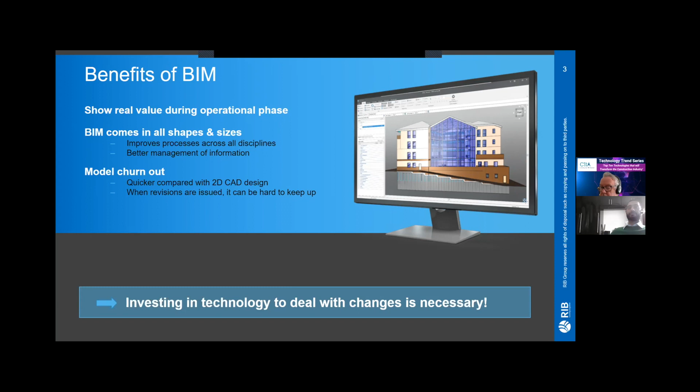So with a tool like i2 CostX, we've had a lot of interest in the revisions feature in particular in the past few years. It's been a hit from the asset owners doing cost reinstatements on existing buildings to the cost consultants who want a full audit trail during the pre-contract phase.

And after Rev 152, the client says, let's go back to Rev 101, because that looked a lot cheaper, and I like that design more. To go back to that revision and that iteration is possible in CostX. You can compare the drawings together, and you can run reports to show the variance. This also applies for post-contract, and you can provide cost value reconciliations to clients, which are extremely valuable.

An example that springs to mind, it was a large project just outside of Dublin, and the subcontractor put in a claim for 6 million, and my client said to me, I think this is too much. Can you help me identify this change in the model and see if there's any basis to this claim? It turns out that the claim was only worth around 2 million. So whether the subby was being devious or it was a genuine mistake, at least it was realized, and the benefit of doing this 5D exercise was clear.

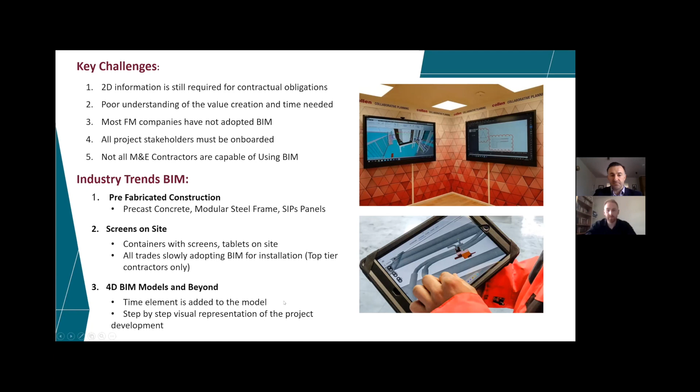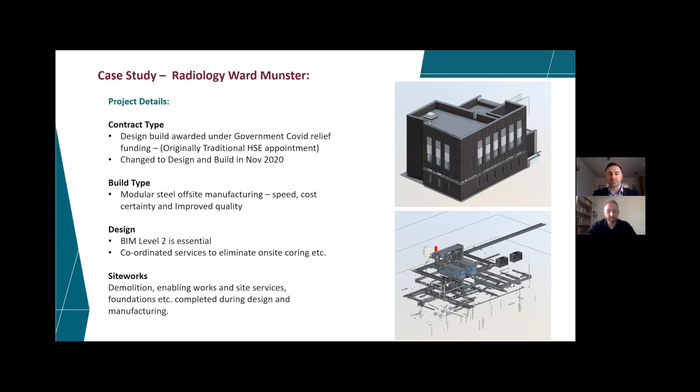So for this, we've come up with a quick case study of a building we're actually building at the moment, and this really demonstrates the true value of BIM and design build. So we've got a radiology ward in Munster that up until November 2020 was originally a traditional HSE appointment, and because of COVID relief funding, they changed it to a design build in November 2020. So the build type is modular steel offsite manufacturing, used for speed, cost certainty, and improved quality. The key catalyst of this is BIM level 2, which is essential for architectural, structural, and M&E building services. Without that, this project wouldn't work.

So compared to traditional, this building would have taken 3 years through public procurement, GCCC contracts, etc. We're seeing this done in 40 weeks. We need to learn from this. We need to be able to build buildings this quick, and BIM is the key catalyst. So I'm going to hand over to Cal there to go through some more detail of the design collaboration.

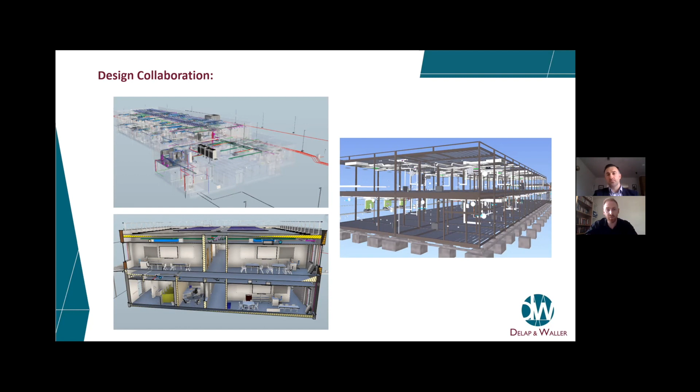But even with the interoperability tools, we were able to coordinate with those guys for all their external services and incoming services. So the likes of the architect, we were able to coordinate for ceiling voids, all our ductwork above classrooms, the steelwork for all our ductwork, pipework, foundation work, coordinated around all that. And this time we had the fixed furniture as a Revit model, which was a great help for us. It meant we were able to design our teaching walls, as it was an educational building. All our small power data were able to get laid out and designed from a very early stage. So definitely from a design perspective, huge benefit, and with weekly DTMs and weekly workshops, we definitely ironed out a lot of issues at a very early stage. Okay.

So clash detection, probably another one of the main benefits of using BIM in our projects. We've actually built clash detection into our normal design process in-house. So for all our projects, we have weekly clash detection reports printed off, even just for peace of mind, to check our own work, just to make sure we're designing everything fully as it goes along, finding huge benefits in it. Then when it goes to shared for the wider design team, we're having weekly meetings, and resolving these clashes at a very early stage is obviously saving costs.

We're not reordering steel or anything like that for the sake of a mistake. So that's definitely working out really well. For the sake of producing reports from the model, we can assign items, we can assign tasks. Everyone's tracked, so everyone's recorded the progression of the site. So it's definitely a massive benefit for us guys.

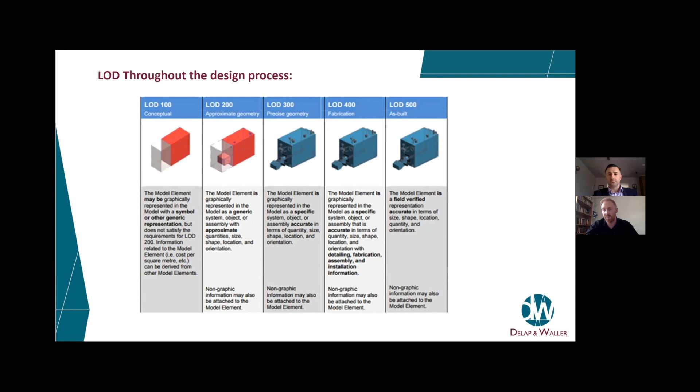And probably more importantly, the non-graphic information that's attached to the family. So all of your data sheets, all of your technical information, that's going to be embedded within this family. So when we go to run off schedules later on, it's back to what Milan says, having confidence in the model. So if we're having greater levels of detail, people are going to have more confidence using the kit, and it's going to help the BIM process move along.

So it's very reassuring to see a lot of the manufacturers get involved with producing these for the BIM process. And a lot of them are now getting accredited for the work, so it's getting the rubber stamp. So it's going to have massive benefits. It's going to help us produce a better end product. It's going to get a better end product for the client. It's going to give more value to the BIM model.

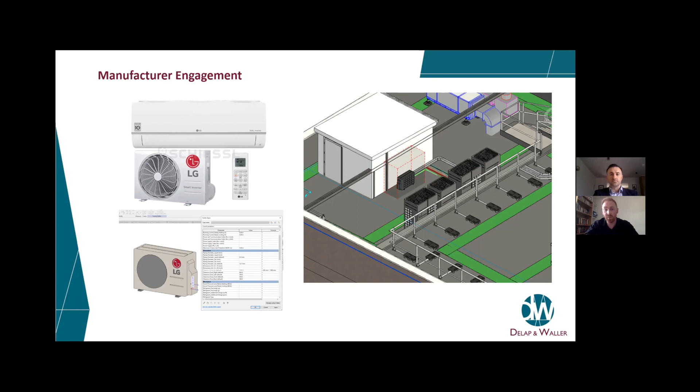So it's going to help the whole process along. Okay. So just for our final slide, just a few notes on where we see the future success of BIM from our perspective from the building services. So generative design has been mentioned previously. So we're going to start using it for mechanical design. So we're getting instantaneous designs based on a set of parameters. So it's going to give our engineers more time to do their engineering work.

FM engagement. So what I've talked about, all the previous data, technical information is going to be held within our model. So we want the FM team to be able to run the building to its maximum potential. All the information is there. They're better off using it.

New talent in the industry. So the BIM process is becoming a lot more popular. We're starting to see people come across from other industries, graphic designers, data, information. So all this new talent is going to bring new ideas, going to push the boundaries of what we're doing.

Over the last year or so, we've seen COVID help speed up BIM processes, and for sure it's showed how important technology is within the construction industry, which might not have been as realised in previous years gone by. So for collaboration, like weekly Teams meetings, we're just going to see it more, and it's definitely helping the collaboration process.

Just on a final note on sustainability, we're seeing a growing interest in energy consumption and green buildings. BIM tools are starting to comply with standard sustainability assessments, which is brilliant. So to save us duplicating work, having a sustainability model, we just want to see a few more further improvements in interoperability to save the duplication of our work, and just have it all centralised within the model.

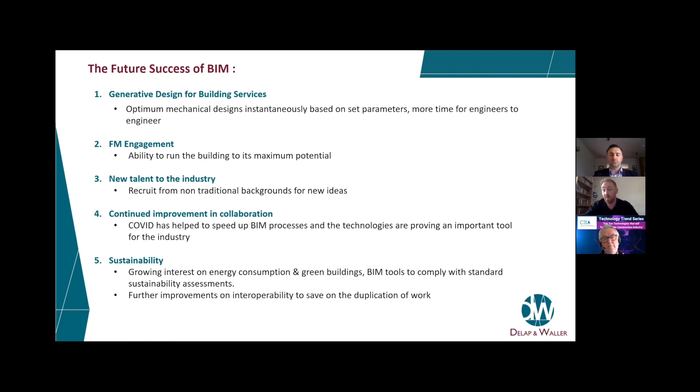Okay. Thank you very much, Conor and Cal. That was very informative. A lot of interest around, Conor, your comment about abandoning the model. We might come back to that. There's a few comments coming in on that. I suppose that's the pragmatic approach, bearing in mind that the rest of the supply chain maybe are not using it or whatever.

But what's coming across very strongly is, again, like what Milan said, Conor, you mentioned about clients, to get this cultural shift, we need to get clients requesting this, and we need to get smarter clients requiring this going forward. So thank you very much. So plenty of scope for questions as we get towards the end.

So our next presenter is Davitt Lamon. Many of you will know Davitt. He's based in C.W. O'Brien Architects. And if we're talking about what's trending at the moment, we have to talk about the Irish Annex to 19650 Part 2. So Davitt, you might talk us through that and give us an insight as to what's happening in the world of architecture. Perfect. Yeah, will do. Thanks for the introduction, Alan.

Much appreciated. If you're wondering who am I and what I'm doing talking to you about BIM while you're trying to have your lunch, I'm an associate and a BIM manager for C.W. O'Brien Architects. I first got introduced to BIM about 11 years ago while studying architecture technology at TU Dublin. I joined CWO in 2015, and shortly after, I started my MSc in Applied Building Information Modelling and Management at TU Dublin as well. I couldn't get enough of the place, so I started part-time assistant lecturing in TU Dublin in BIM and visual programming. And just recently, I started my second master's there in digital construction analytics.

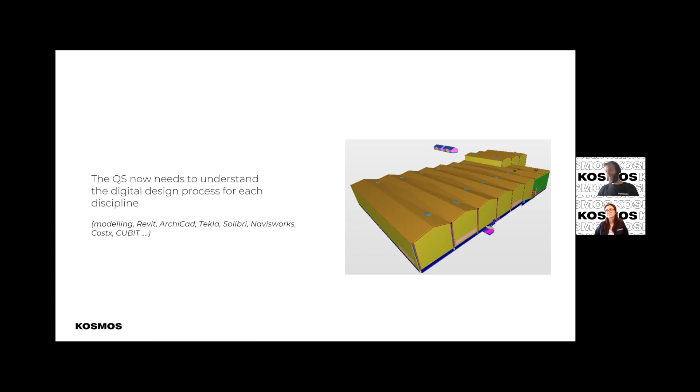So a quick diagram here. This is an architectural model, and what we say here is that the QS needs to understand in principle how the architect designs and delivers their model. The software they're using, whether it's Revit or ArchiCAD, or if it's structures, it's Tekla, or Navisworks for clash detection, or Solibri, or whether it's CostX or Cubit, it doesn't matter, as long as we have an appreciation for that and understand that each model is different and how each discipline approaches their design is different.

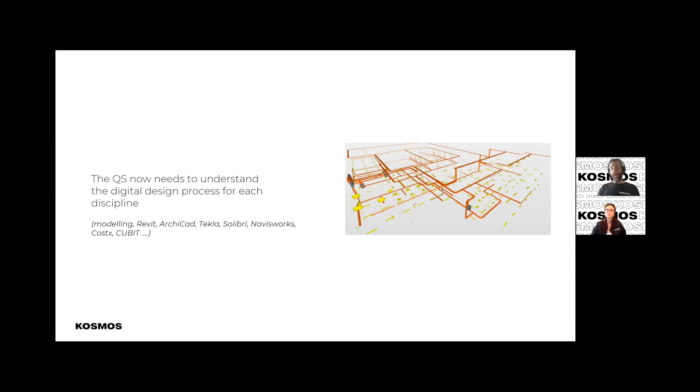And as you can see, we also look at the services. As I mentioned, this is a vital part because, as Conor will know, services is growing and growing in volume in our buildings, and it's becoming more and more relevant to have more detailed design on services, as well as our FM, facilities management services, being such an important key part of controlling our cost in our operations.

So having this knowledge on the services and using that valuable information that the engineers have produced is key for the quantity surveyor. And as we said in a previous presentation, I would prefer if the architect did my quantification for me.

I would prefer if the services engineer did my quantification for me, because it's part of their design process. Now, I don't mean they do the quantity extraction. I mean they build the elements for us to allow us to do that quantification in an automated way. That's a very, very nice change in our traditional quantity surveying practices.

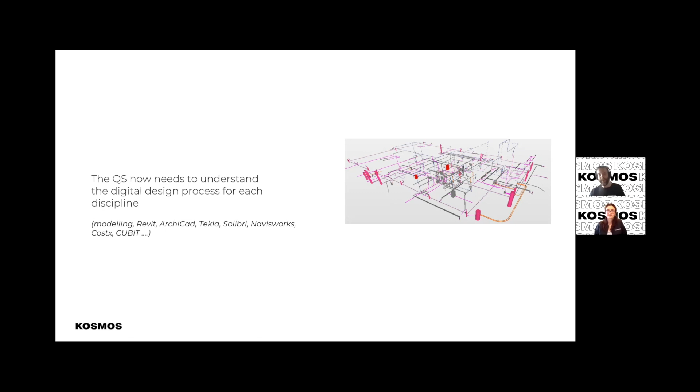Yes, I will intervene here, Ross. By taking advantage of all this work that the disciplines have put on modeling and designing this, we have actually reduced all these time-consuming tasks that are pretty much hours wasted and pushed them early in the process, as you have shown in the diagram. So now we get to understand the building better and actually provide more value rather than this very manual process that we have been able to optimize.

And that's true. The fact is that we have the tools to automate now, so why not automate? Let's move away from the manual heavy quantification and move into automation and value driven. Understanding the level of detail is key here for the QS. It's key for the design team to know what level of detail they will provide at each of the design gateways. This level of detail tells us as cost managers how we should quantify, what we can take from the 3D models, what we need to do on 2D,

and how that level of information develops during the design stages. The quantification from a Revit model in LOD 100 is completely different from the quantification of a Revit model in LOD 350. And for us as cost guys and ladies, we need to understand that so that we can again develop that design information with the design teams.

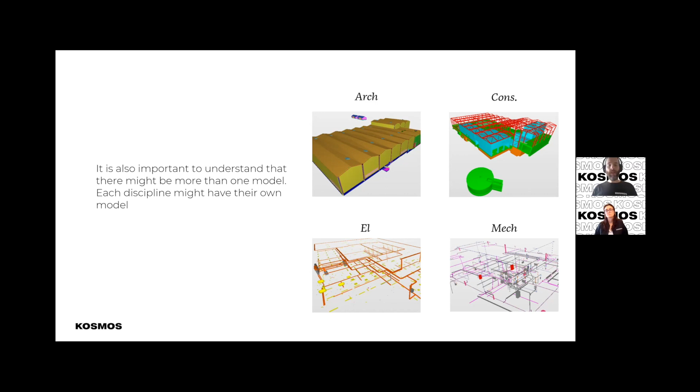And here's another troubleshooting. Understanding the quality and accuracy of information is of value to the QS. So we notice something in a model, we'll take a screenshot, send it to the engineer, or use BIM 360 to communicate. We've seen an issue. Perhaps you guys need to have a look at it. And it's adding more quality to the project.

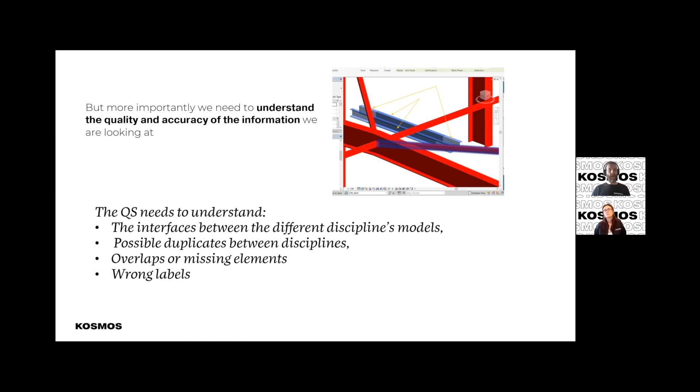If we do a quantity extract here, we get these extra beams that we didn't need to cost, or we put it in our bill of quantities, and suddenly it's actually an error. So post contract, you're doing change management that's really unnecessary. It's because you haven't actually qualified the information. And of course, it's design responsibility, but again, you as the QS are using this, and this is reinforcing the idea of integrated collaborative teams, regardless of contract structure, in my opinion, but that's up for debate.

Part of the design team. Sorry, that was just my 10 minutes up, so I'm just going to hit pause on that, or maybe cancel even.

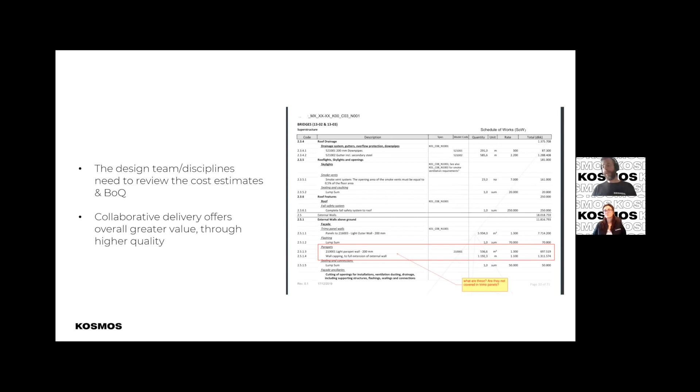You'll see an example of a cost estimate here, our BOQ, depending on your method of measurement, of course, and the jurisdiction you're working in. But this document is also sent to the design team, each discipline, to read through, to qualify, and you get comments back here relating to certain aspects of the cost plan, because the disciplines will understand quite well what they think should be included in the project. So again, you're increasing the quality not only of the design information but also of your costing information.

And the final output of this integrated process is that you have a better qualified, coordinated design that's designed to cost. So what we're saying is you can practically guarantee your client better quality, more coordinated design, and it's on cost by running this integrated process on the projects. And that's very important for clients to understand here. Some say there's a premium to this delivery. I'd argue that it reduces cost, but again, that's also up for debate.

Final delivery in your cost plans and cost estimates. We've highlighted here again a cost estimate where we try to automate text from the 3D models into our documentation, so we're not retyping this every time. If you do a manual process, you run the risk of error. We identify our BIM code so that the contractor can take the bill of quantities, our cost plan, and look into the 3D models and quickly identify what we're actually looking at. And of course, we automate the quantity. And this is CostX. This is our report from CostX and how we build up our CostX documents.

And also, of course, if there is no code, it means that it's a manual measure from 2D drawings or assumptions or what have you. Or even if there is a code, it might not be modeled, it might be referred to in the specifications. But at least we are creating here some sort of connection between the information, so you can relate the cost to the specifications, to the model geometries.